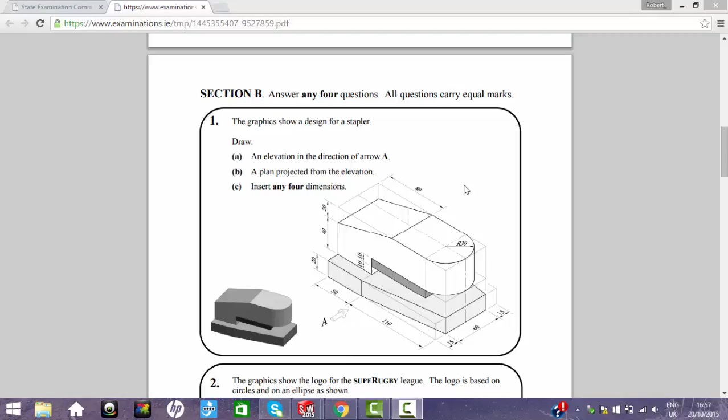Hi lads, this is a video explaining how to model this part on SolidWorks. This part comes from the 2014 Technical Graphics ordinary level paper, section B question 1, and it's basically a stapler. I'm going to show you how to model this on SolidWorks.

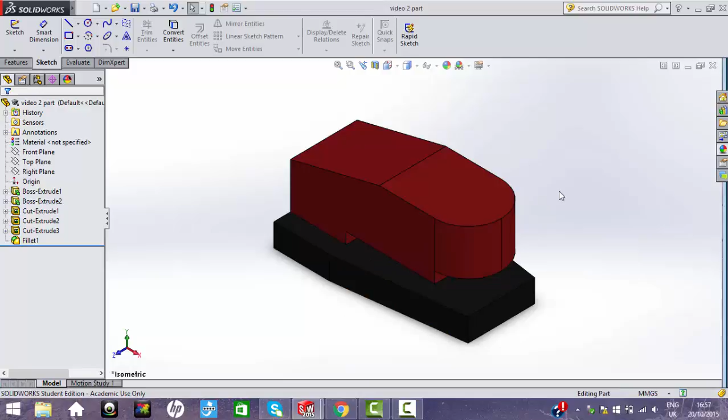So this is one I made earlier. I just put a few appearances on it to make it look more realistic. This is how it's going to turn out basically. I'm going to go through how to draw one from scratch now.

If I go back to my drawing, I can see there's two main rectangular blocks that I can draw first with the total lengths on them. If I draw them first, I can use extrude cuts and fillets to strip back the shape and make the object.

The first thing I'm going to do is draw the base of it. I can see there's a rectangular block measuring 110mm plus 50, which is 160mm, by 60 and two 15s, which is 90. So it's 160 by 90. So I'll go into SolidWorks now.

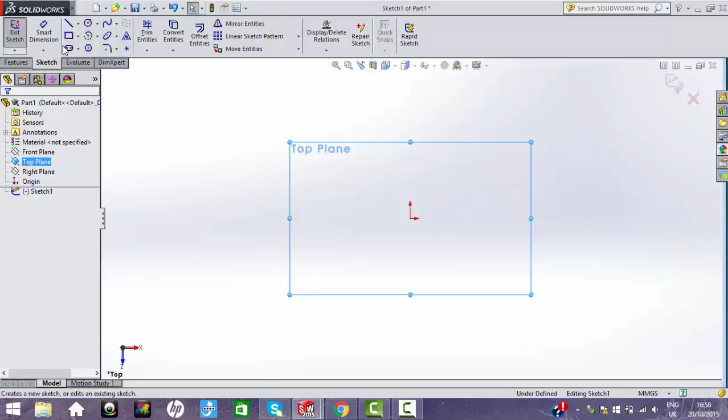I'll draw on the top plane, and sketch a rectangle from the origin. Next I'll use my smart dimension function. I said it was 160 long by 90 wide, and that's my fully defined sketch there in black.

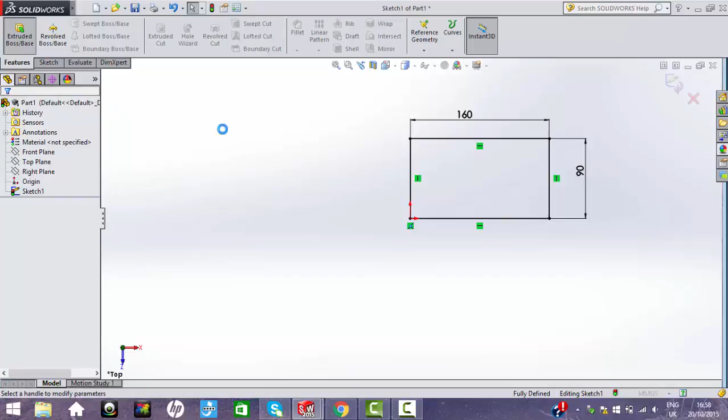Back to my drawing again, I see it's a thickness of 20. So I'm going to use my extruded boss base function up here in the corner, and type in 20mm. That's my first rectangular block made out, as you can see there.

Back to my drawing again. I'm going to draw the next block now, which is, you can see from the drawing, 60 height, 40 plus 20, and again 160 long - the same length as the other block. So again I'm going to look at my top plane and draw this.

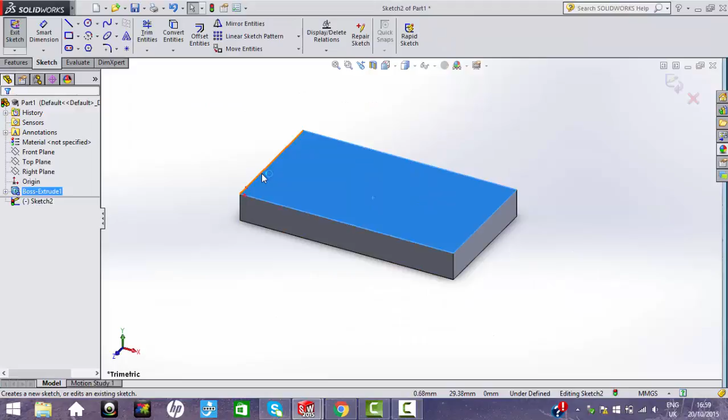I sketch on this face, normal to top. I said it's also 60 wide, so that's where I'm going to start. I'm going to draw from the center line, drawing half the sketch first, doing it half at a time. So if I just draw a rectangular sketch like this...

Without any dimension at all, click OK there, and the next thing to do is smart dimension the sketch. I said it was 60 wide, so it's 30 each side, and I'll check it should be 160 long. Yeah it is, so I don't need to do anything with that.

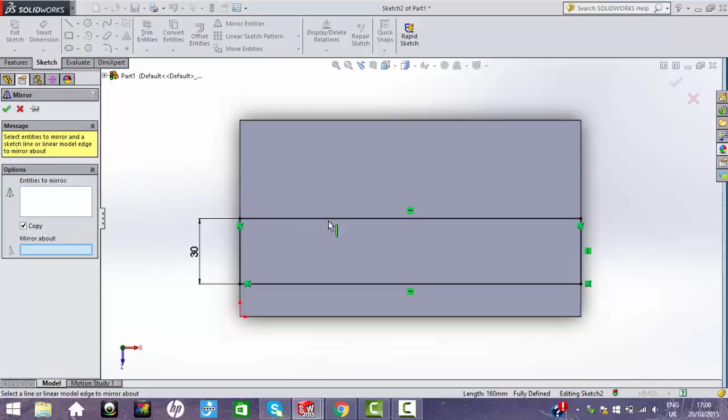The next thing I'm going to do is mirror over my sketch, because this is only half the sketch. So I'll use the center line in the middle, and mirror these three entities here. That's okay now - that's my fully defined sketch. I don't need the center line, so I'm just going to trim that.

And I'm going to extrude the boss base up, extruding my sketch profile up. If I look at my working drawing again, I can see it's a height of 60, 40 plus 20. So let's type in 60 here now. And that's my two first blocks made out.

So that's basically the overall shape of it. All I need to do now is strip back using cuts and things like that to form the shape. Next I'm going to put in these angle surfaces here - it's a cut 15mm in, and it goes back 110mm. So I'm going to draw that on the top plane, and that'll give me my cut.

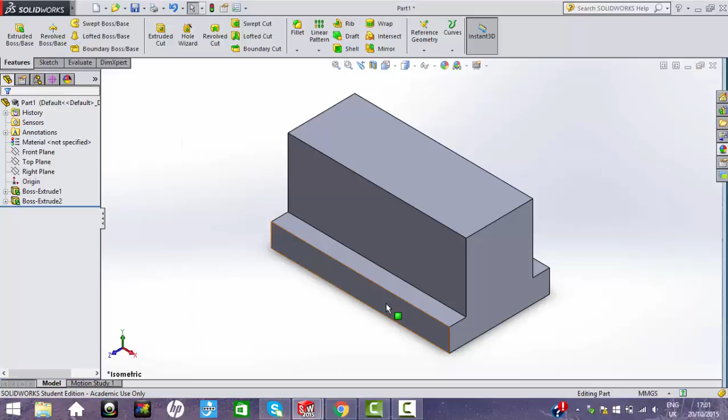Click the top plane, sketch on it, normal to top. I said it was 15 in, which I have anyway. So I'm just going to go back 110 and join this up.

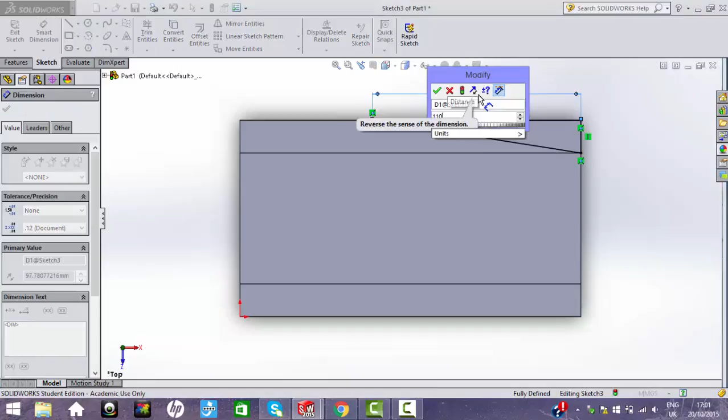Add any dimensions at all, then time to smart dimension it. So 110mm, and this should be 15mm if I made it right perfectly. Yeah, it is. So I'm going to just draw a center line here for construction purposes.

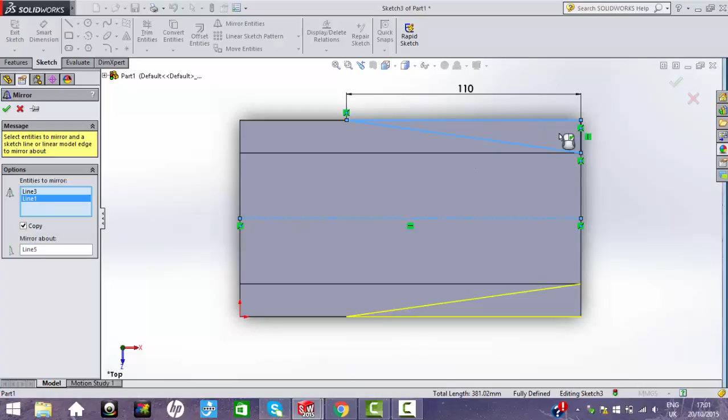I can mirror my sketch over, because it's the same on both sides. So if I mirror about this center line here, and I click these 2 lines here that I want to mirror over, that should be perfect, and there's my sketch profiles.

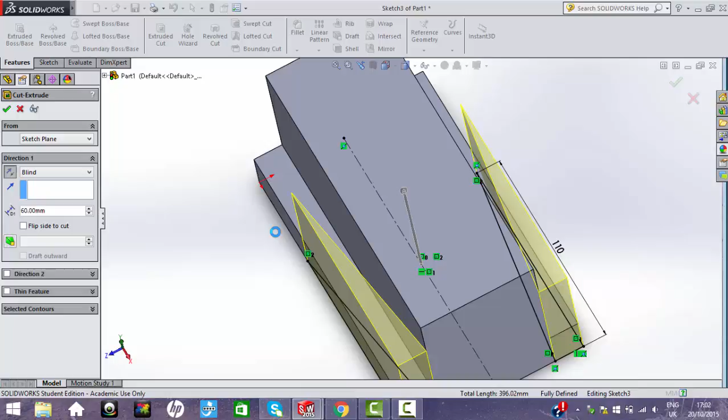So the next thing we have to do is extrude cut, and it's going to flip the direction here, and all I'm going to do is just make sure that it intersects all the shape, like so. And there is my first 2 cuts made, and go back to my drawing. It's just these 2 cuts here, so yeah, that looks okay.

So the next thing I'm going to do is, I can see there's a cut on the back shape here. It's just 20 down and 80 from the back of the shape, so that's just a simple cut as well. I'm going to start that now.

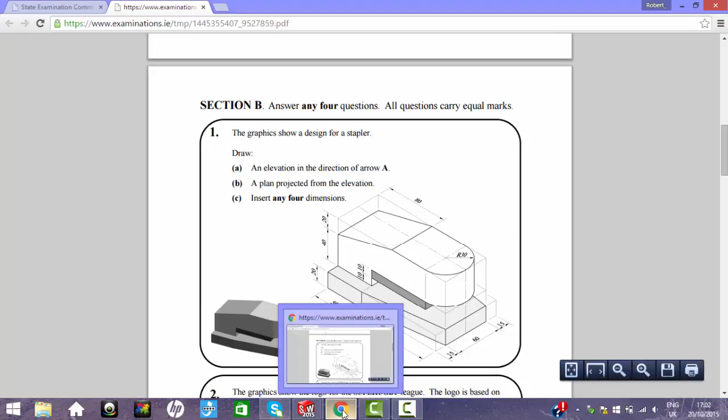So I'm going to draw on this face. I'm going to select this face, sketch it. Again, normal to, look orthogonally at it. I'm going to draw my random sketch profile and smart dimension it later on.

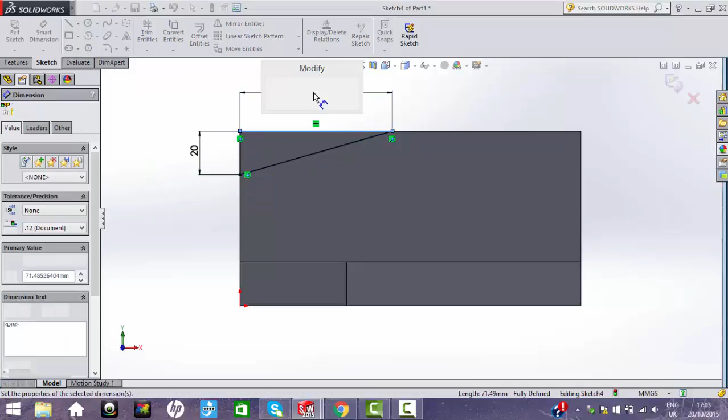So I said it was, wait till my drawing again now, it's the 20 down and 80 long. So this line should measure 20 mil, and this one should be 80. That's perfect. So there's my fully defined sketch in black.

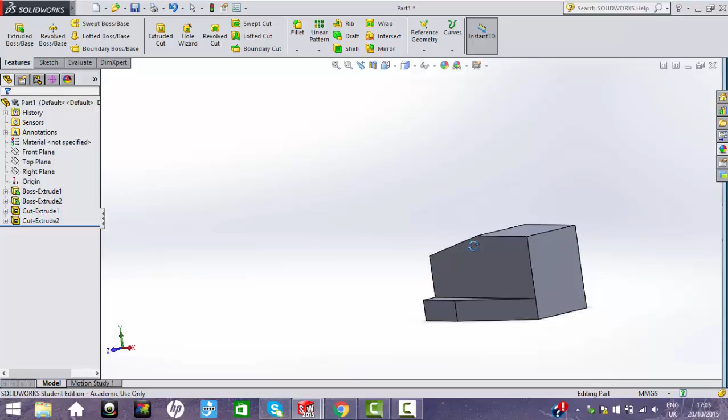All I'm going to do is extrude cut feature again and make sure it's up to the next surface. Yeah, it is. So cut that, 60 mil wide, and there's my sketch cut out. So again, see it's starting to take shape again now.

The next thing I need to do is the middle of my stapler here. I can kind of see that I need to cut out this piece here. So if I look overall, I can see that if I come out 50 and start my sketch here, go up 10, and then I need to sketch this line here. I don't know the length of it, but I know that the fillet here is 30 mil fillet.

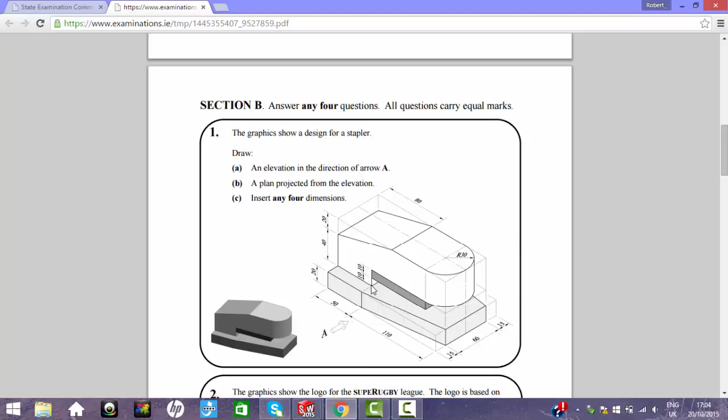So if I take 30 millimeters from my total 110 line from here where I started my sketch, it should give me 80 mil. Just basically 110 minus 30 is 80. So I know that length of the line is 80, and I come up another 10 mil and then finish out my sketch till the end. And if I just basically draw that out and cut it through, then that should give me my shape. So it's kind of hard to explain, but I'll just show you here now on SolidWorks.

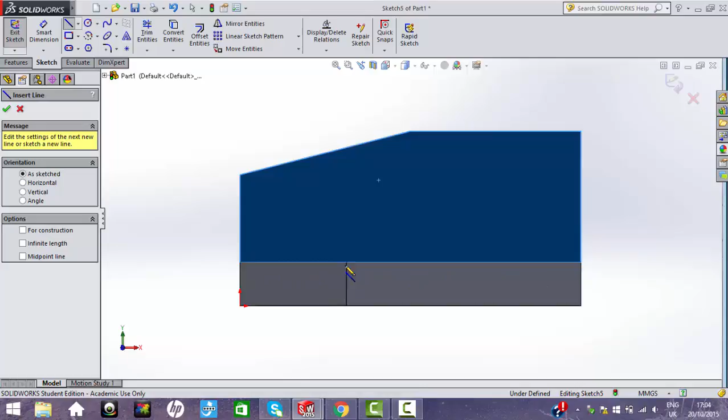So again, I'm going to be drawing on this face, so I select it, draw a sketch on it, look at it orthogonally 90 degrees again, and normal to. So as I said, I know this line is 50 because that's where I started my sketch, is 110 and this is 50. So if I just start my sketch here and I come up 10 like I said, and this line should be 80, up another 10 and finish up my sketch here, then just join it up.

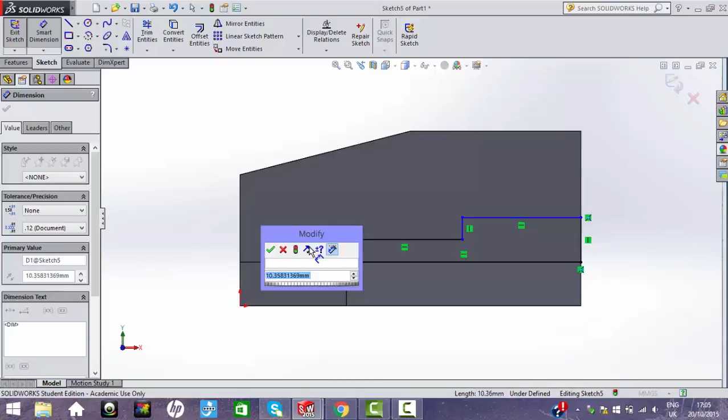Oh, those are random dimensions, but I'm just going to dimension it now. So like I said, this is 10 mil here. This line should be 80, which is 110 minus 30. This line should be 10 as well. And the rest of the sketch should be okay.

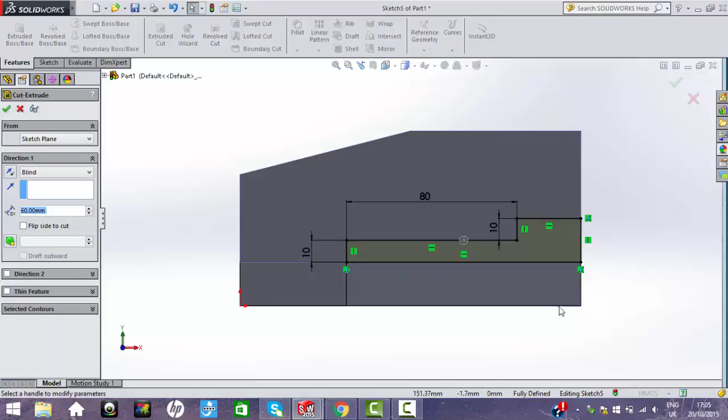So next thing to do then is just cut this through to a dimension of 60 mil, because I know that this block was 60 wide, so if I just make it 60 mil, it'll cut up to the surface here. Yeah, there we go. So there's our sketch profile cut out, and it's put into isometric now. You can see it's starting to take shape, like this pictorial view here in the working drawing.

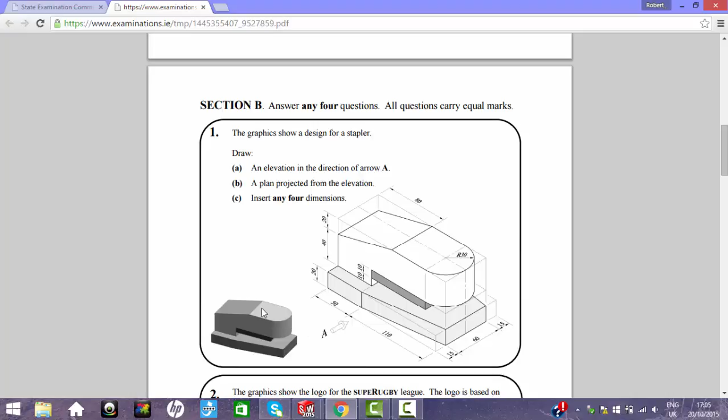So that's nearly done now, lads. The last thing I need to do is put in this 30 mil fillet at the top, which is an easy job. All I need to do is select my fillet, type in 30 mil fillet, and select these 2 edges here. And you can see a preview of the fillet there, and just click the green arrow, and that should do that for me.

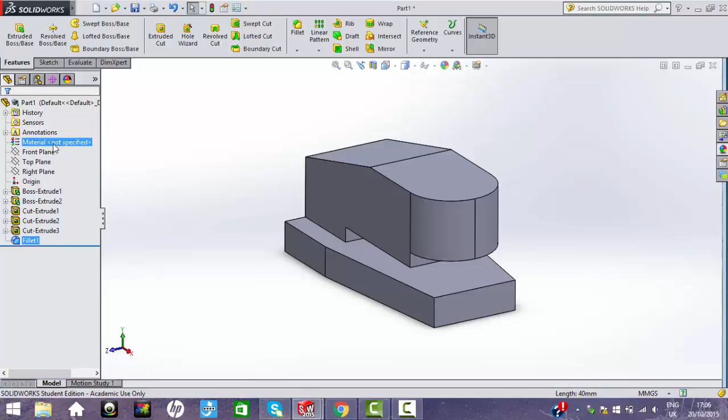And there is my object modeled on SolidWorks, lads. So that's all.